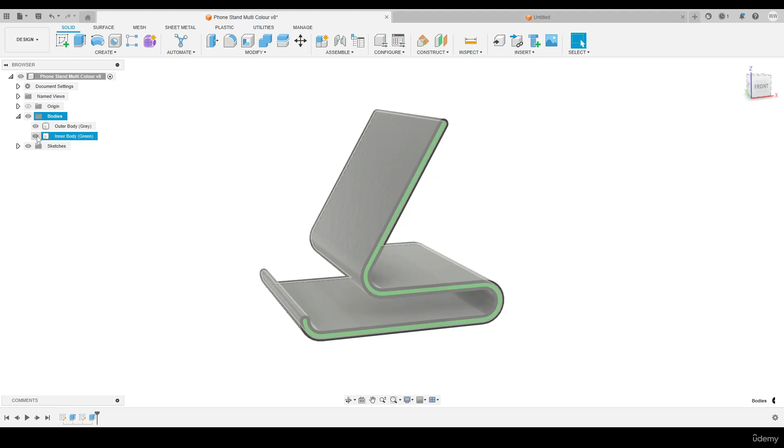To enable these features, we need to create two individual bodies that we can each assign an appearance to. If we look at the browser, under our bodies folder, I have two bodies here, one titled outer body grey and inner body green. If I hide the green, we'll see the single body there. And if we hide that and switch those around, we'll see the other body.

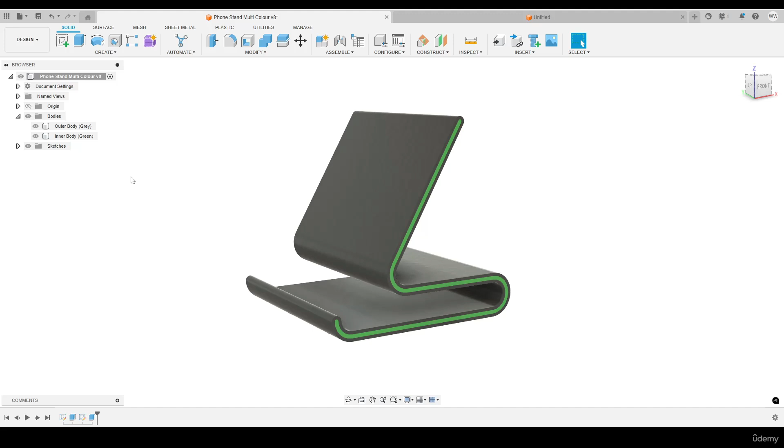This makes for an interesting 2D sketch, where we take advantage of the offset tool to give us two separate profiles. We can then project these sketches and form two different extrusions, giving us the two separate bodies. I've included these sketch dimensions here if you would like to model this yourself, and from here on in I will have a go at this sketch and model.

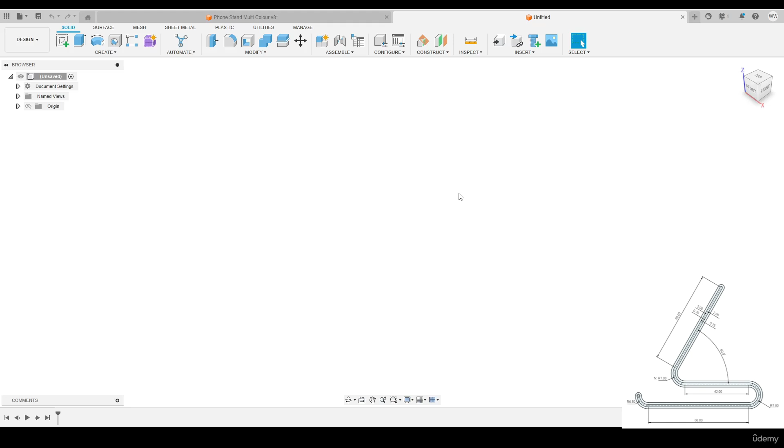So let's begin, let's start a new design. The technique I'd recommend here is to model the inner profile line, then simply offset that in both directions so that we get two profiles, and then we can extrude both of those as separate bodies.

Let's go on Create Sketch, and we're going to do this on the XZ plane, starting at the origin. To start with we're going to do an arc - I'll do a 3-point arc, starting at the origin. I'll bring this roughly down here and draw a rough arc, which we can later dimension and constrain.

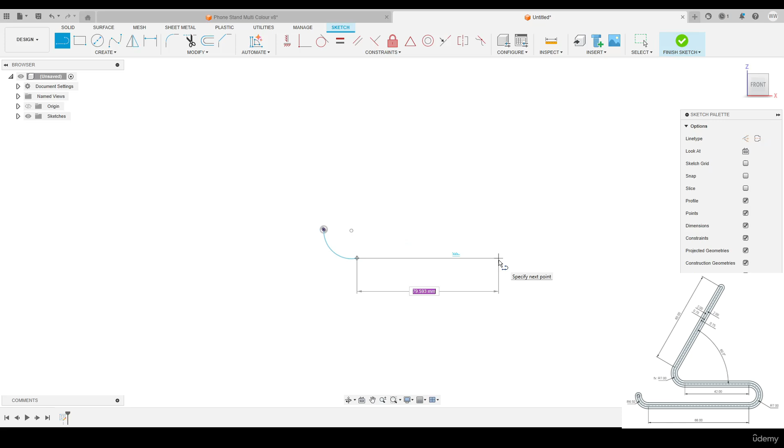Let's press L on the keyboard, and come across here by a dimension of 66 mil. Press Enter. I'll stay on the line tool, hold down the left mouse button until we draw out a tangential arc, like so.

Then we're going to come across by 42 mil. Again, staying on the line tool, draw out another tangential arc roughly like so. Then we're going to draw up this line here, which is about 60 degrees.

Let's tidy up these dimensions. First of all I'm going to apply a tangential constraint - we need a tangential constraint between this arc and this line, the same between this arc and this line, and likewise this arc and this line here.

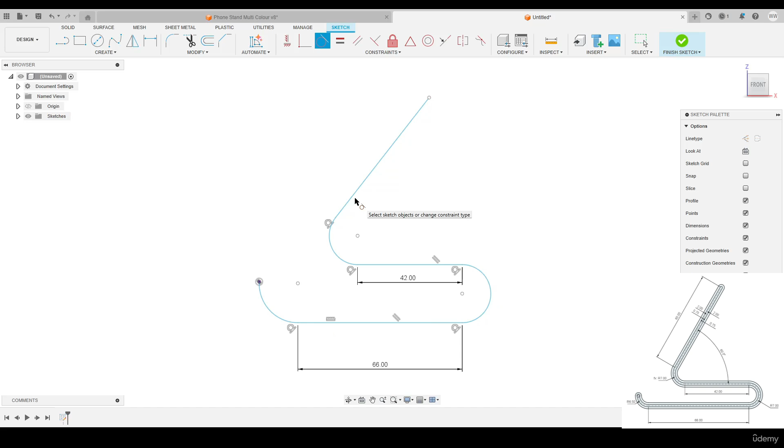Let's press D on the keyboard and dimension this arc here - that's got a radius of 6.5 mil. Let's dimension this arc here - that's got a radius of 7 mil, and this arc here also has a radius of 7 mil. We're going to apply a length to this line here of 80 mil.

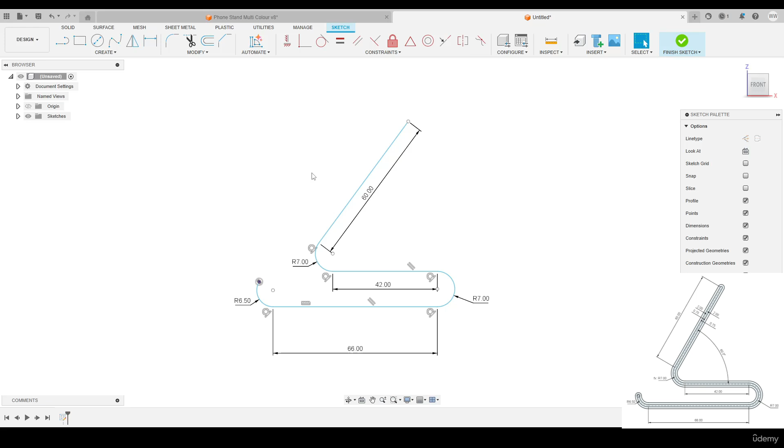Then we're just going to revisit the arc down here - this is still mobile, as we can see. What we want is a horizontal constraint between the origin and this point here. So let's choose the horizontal/vertical constraint, select the origin and this is the center point of our arc here. We'll select that, and now we'll see the majority of our sketch in black.

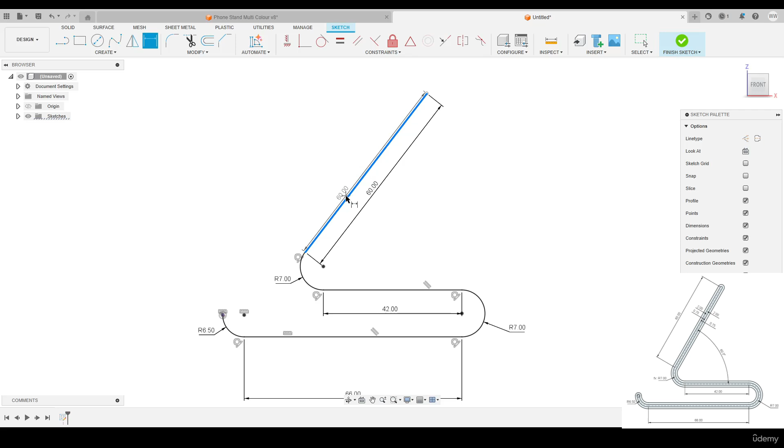The only thing we need to define here is the angle of this line. Let's hit D on the keyboard, select this line and this line here, and this has a dimension of 60 degrees. Press Enter, and now we should be fully constrained - everything's in black. If we go into our sketches folder, we'll see the red padlock there, indicating everything is now fully constrained. That's fantastic.

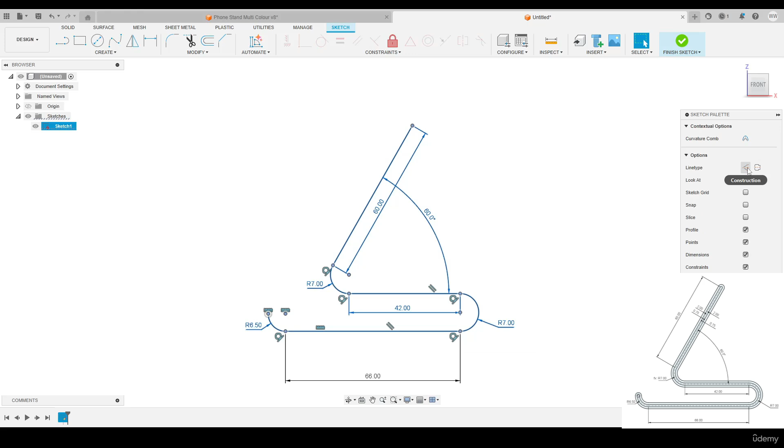Now we need to create the two profiles to extrude, for both of the individual bodies. For this, we're going to use the offset tool, referring to the entities we've already drawn. We don't want these to create any profiles, so I'll drag select around those and identify them as construction lines.

I'm also going to turn off all of these dimensions, since it's getting a bit hectic on the screen. So in our palette, turn off the dimensions to make it much easier to see. I'll also turn off the constraints for now as well.

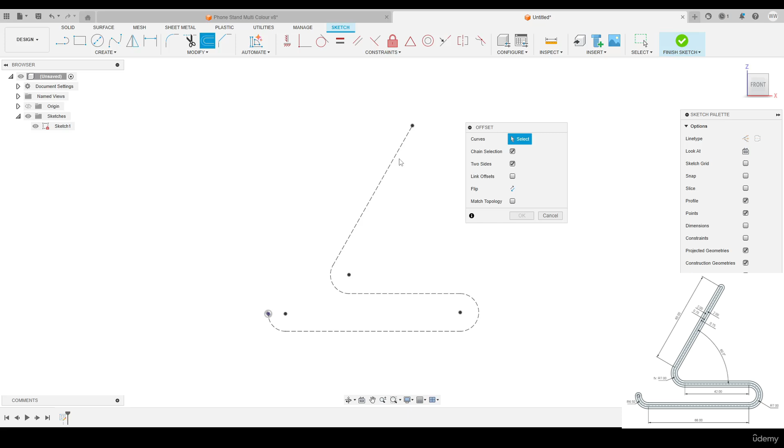Let's use the offset tool, hit O on the keyboard. In terms of our curves, we need to select our curve here, making sure we've got chain selection turned on and two sides turned on as well. If we select this entity with chain select, left click once, we've got the offset in both directions. The distance we want is 2 millimeters, leaving everything else as default. Click OK, then we want to repeat that process.

I'll press O on the keyboard, select our construction line again, keeping everything else as the defaults. Make sure chain selection is turned on, and two sides is turned on as well. For the distance, we're going to go for 0.75. Press OK, and then we need to complete the profiles.

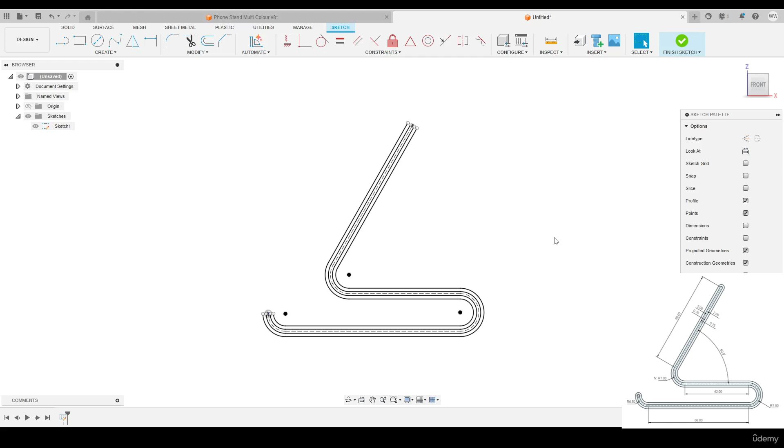Here we need to close up these gaps, and the same on the top as well. Let's start with this one down here. I'm going to press L on the keyboard to use the line tool. We start from this point, hold down the left mouse button, and draw out a tangential arc, finishing at this point here.

The same process, bringing this one around here. I'm happy with those tangential arcs. Just turn my constraints on, make this one tangential as well, this line to this point, and this arc to this arc.

That's looking good. Now there's still a bit of movement here, because we can move this arc up and down, and the same with this one. So we just want to make sure these center points are matching to the endpoint of this construction line, or to the origin.

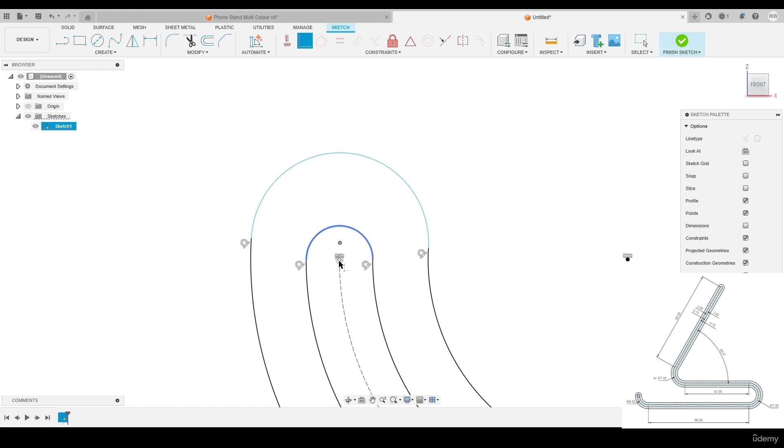So let's go on the coincident constraint, and we'll select the center point of this arc here, then select our place of origin there. We'll do exactly the same process for the center point of the large arc, bringing that to the origin as well. Black in color, fully constrained, looking good.

Let's now take a look at the top. Same process, L on the keyboard, hold down the left mouse button, draw around that tangential arc like so, and the same process here.

Looking good. I want to get that tangential constraint between these two, selecting that constraint from straight line to the arc. It's looking nice, but there's still some movement here - you can see we've got two arcs coming out. So let's repeat the process again.

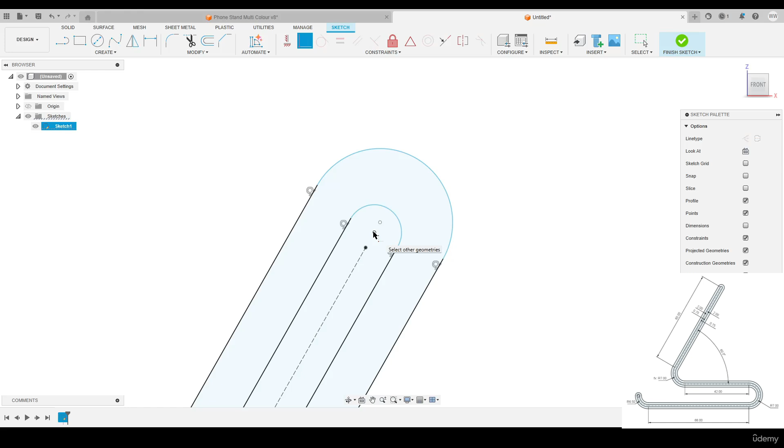Coincident constraint - this time we're going to go center point of the small arc to the end point of our construction line, and center point of the large arc to the end point of our construction line. Right click, OK. If we take a look at our sketch, we've got the red padlock there - it's fully constrained, that's good.

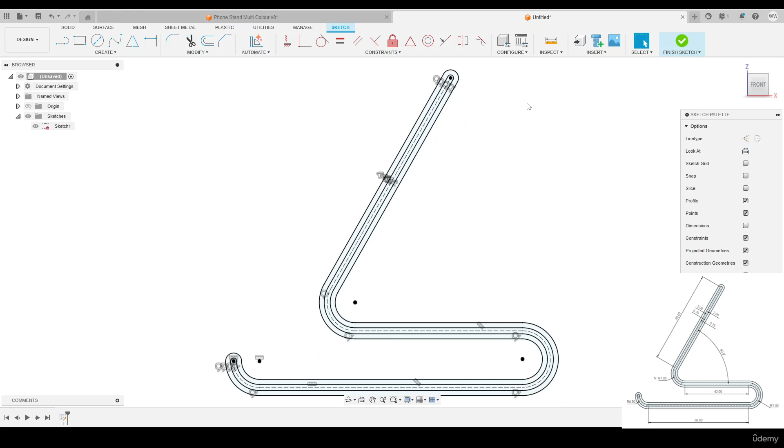And if we look, we've got our two profiles. This profile here, the outer one, that's our gray colored body. And then the inner one here would be our green colored body. So that's now ready to extrude. Let's finish the sketch there.

Let's go on our 3D tools, hit extrude, and go with the outer one first. I'm going to take a look from this corner here, and right click on the view cube to set the current view as home, fit to view. So this is now our home view. We're going to extend this by a total of 80 millimeters. That's OK.

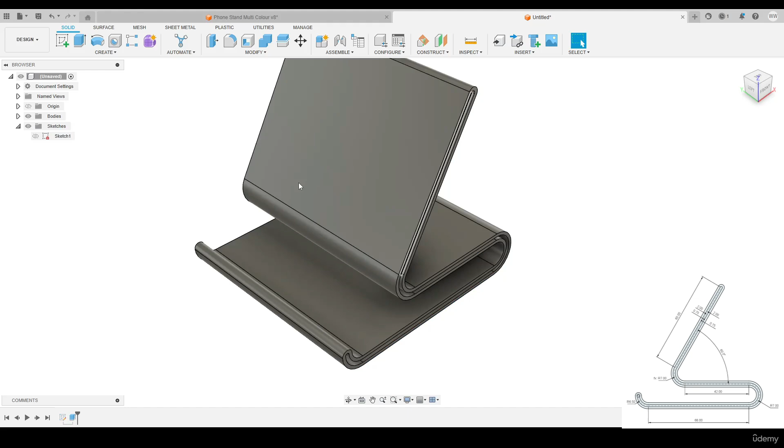And then if we look in our folder here, we've got body 1. OK, and if we look, we've then got this gap in the center there, which is where our second body will be. So to do this, we're going to create a new sketch on the same plane, the XZ plane.

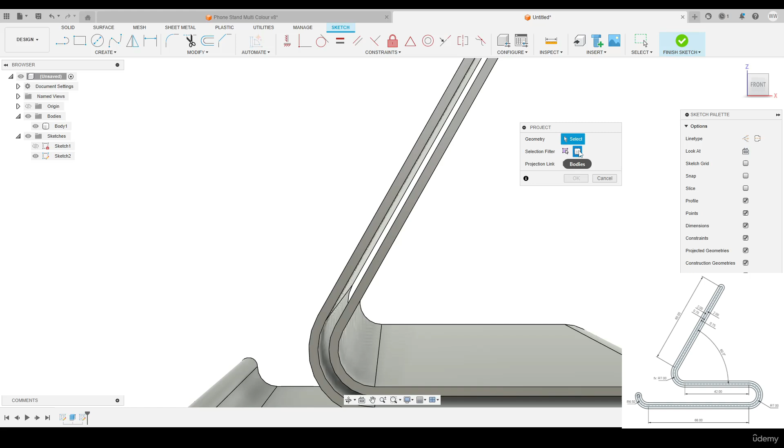And in this case, we're going to project this existing body onto this plane, and then we can extrude from there. So hit P on the keyboard. In terms of geometry, we want to make sure that we're not specifying an entity, we'd have to select a lot of entities for that, but instead we're selecting a body. I'm just going to choose this body here, or we can choose body 1 from the browser. Click OK. Now we can see in purple all of the sketch entities about that body are now projected.

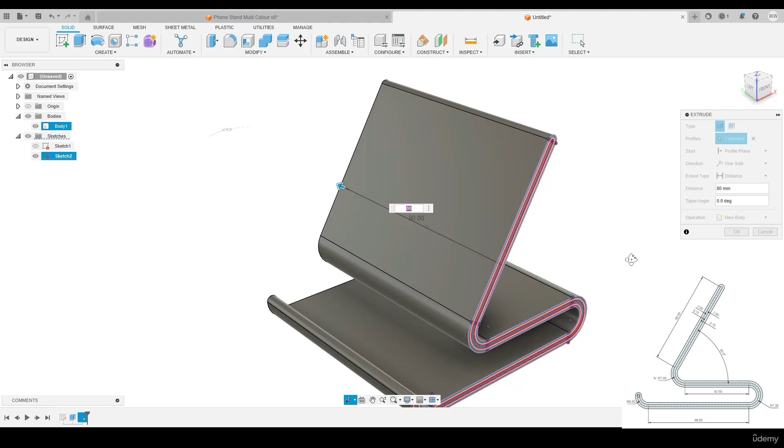Let's finish the sketch there. E on the keyboard, extrude. We need to select a profile. In this case, we want the inner profile. Just zoom out a bit and make sure that's going in the correct direction. Yeah, like so. We only want that going 80 millimeters. And we want to make sure that under our operation that we're going with new body, so this will give us both bodies we can apply each appearance to. Once that's selected, press OK.

Now we can see we've got this join between the two there. And if we look in our bodies folder, we've got body 1, the exterior, and body 2 is the interior. Okay, so there we go. There we have our phone stand.

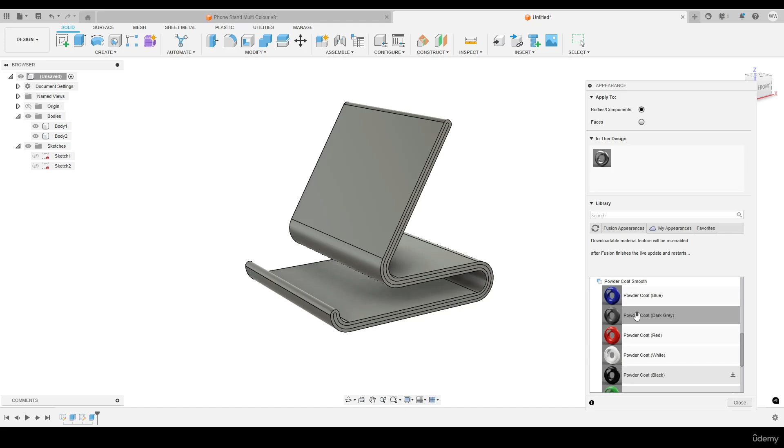Now let's apply our appearances. So hit A on the keyboard, and we're going to come down to our appearances. We're going to come under the paint options, and we're going to go with the powder coat smooth folder. And then under that, for me personally, I've gone with the powder coat dark gray, but feel free to select any of these. We want to apply these to one body only. So I'm going to select that appearance, and I'm just going to drop that on body 1 in the browser. Let go of that. You can see the color change there. I've got a smooth powder coat gray in this case.

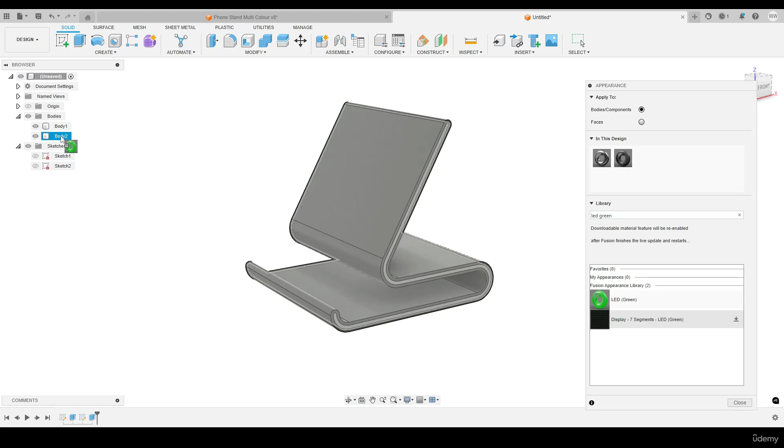And then for body 2, I want to go for one that's called LED green. Hold down left mouse button on this one and drag that over to body 2. Now we can see that appearance appear. We can close that. Just have a look at that from the front view. Everything's looking good there. All the geometry is correct.

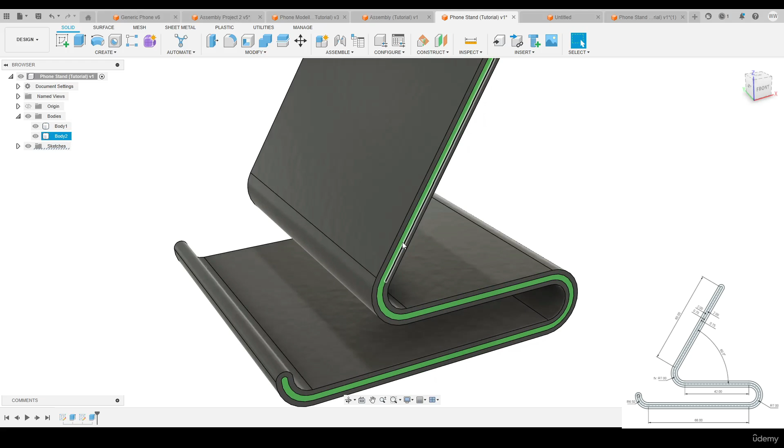I just wanted to add at this point that if you are using a multicolor 3D printer, the slicing software would need to distinguish between the green and the gray bodies. So in order to do this, I would recommend having a protruded face coming from this profile here.

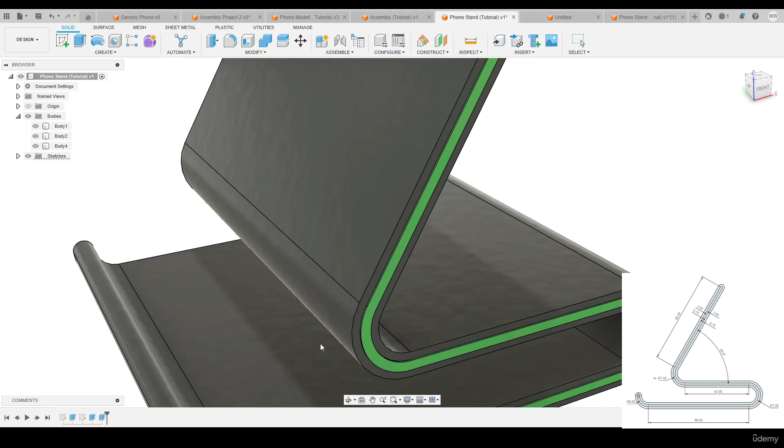So if we hit E on the keyboard and we then select that profile, we can draw that out by, let's say, 0.25. And instead of the operation join, we're going to go for a new body. Click OK. And do the same for the other side. Hit A on the keyboard and assign this appearance to those new bodies. Click close. And then we could even add a fillet to that as well.

Let's chain this edge here. Let's go for the fillet 0.25, give us a nice round over there. And there we have that face protruding. So again, depending on your slicing software, you may need to identify these faces here as the ones to apply the green filament to.

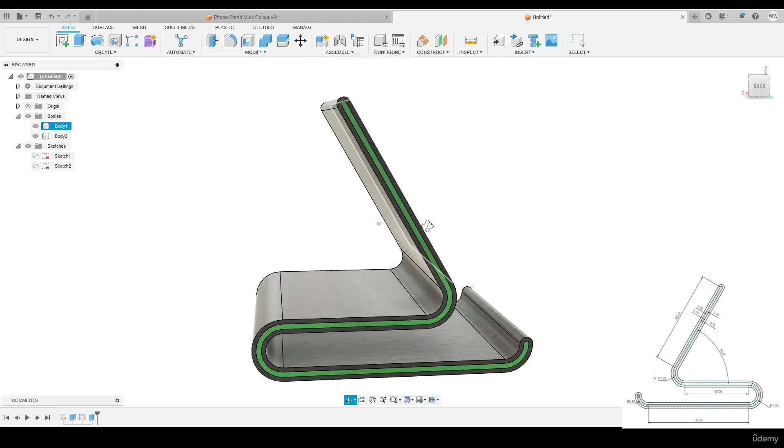Yeah, that's looking nice. Okay, and there we have our phone stand. I hope you're able to follow along okay there.